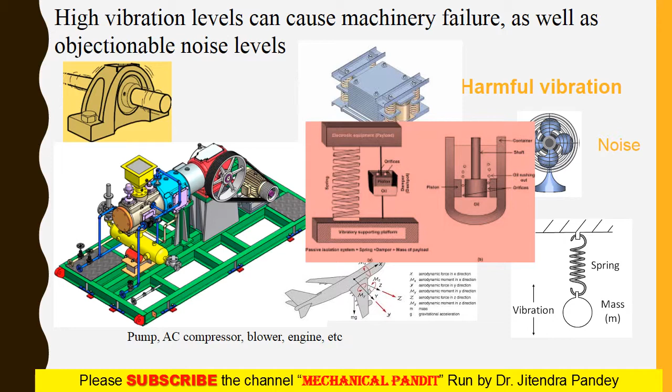This device basically isolates the vibration by absorbing some disturbing energy themselves and allows only a fraction of it to pass to the foundation. Thus the amplitude of vibration is minimized and the structure or foundation is not put to heavy disturbance.

The isolation is expressed in terms of force or motion. Lesser the amount of force or motion transmitted to the foundation, greater is said to be the isolation। जितना कम मोशन ये ट्रांसमिट कर पाएगा फाउंडेशन को, उतना ज़्यादा अच्छा आइसोलेशन माना जाएगा। This is the example of reciprocating air conditioning compressor that is mounted on a flexible roof।

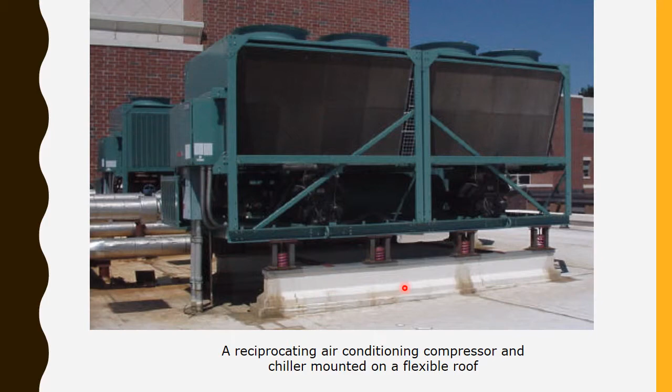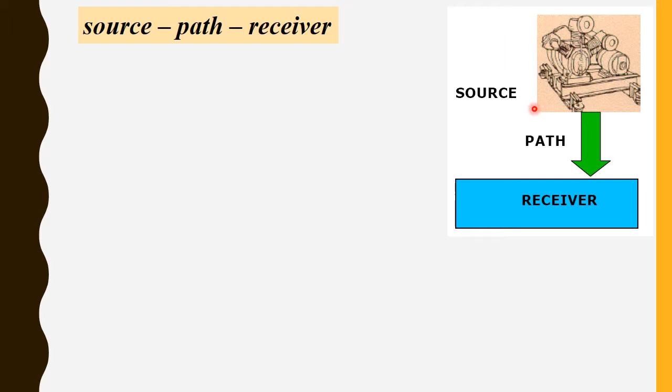बेसिकली किसी भी आइसोलेशन सिस्टम में दो तीन चीज़ें होती हैं जो सबसे इंपॉर्टेंट हैं। सबसे पहला पॉइंट है कि जो मैकेनिकल सिस्टम है या जो डिस्टर्बेंस है वह आ कहाँ से रहा है, दैट मीन्स द सोर्स विच इज जनरेटिंग द वाइब्रेशन, टॉर्क, अनबैलेंस etc. These typically occur at frequencies which are integer multiples of the rotating frequency of the machine.

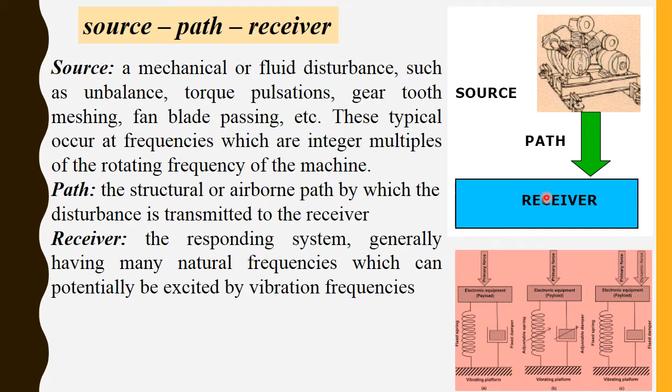Second one is the path which is responsible for passing the disturbance from source to the receiver. And the last one is the receiver which receives the total vibration. The responding system generally has many natural frequencies which can potentially be excited by the vibration frequency, and it absorbs the vibration up to a maximum extent.

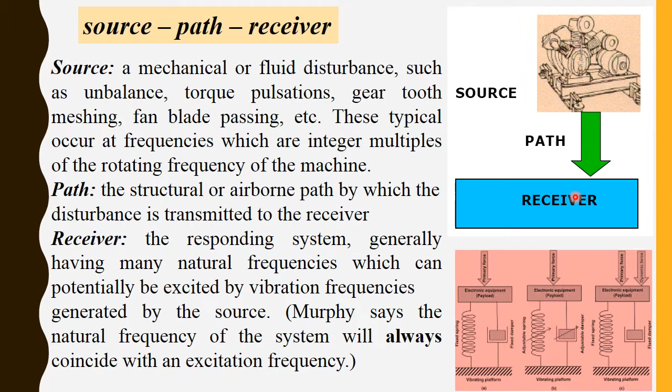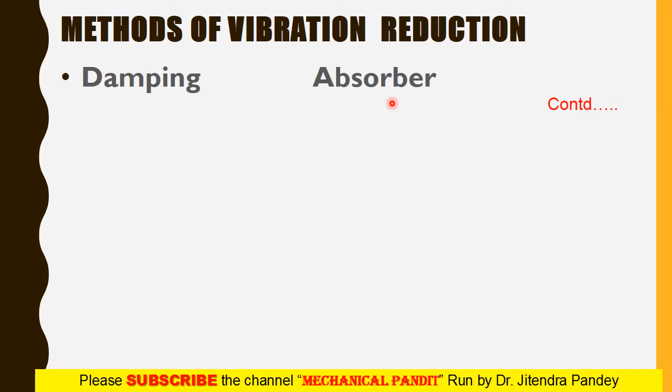We have already gone through the various methods of vibration reduction, in which we have already studied various types of damping, usage of springs, absorbers, isolators etc. These are the examples of how the absorber works, which we have already covered in our last video.

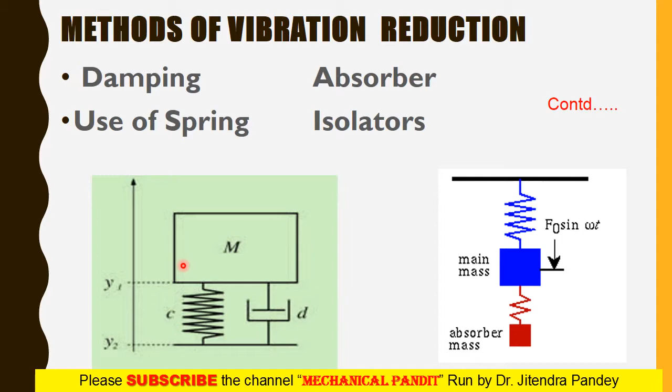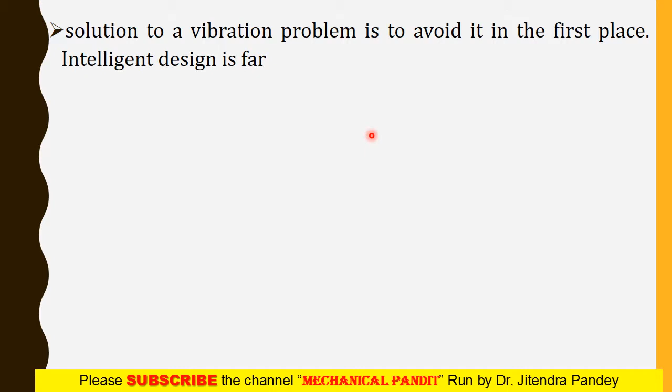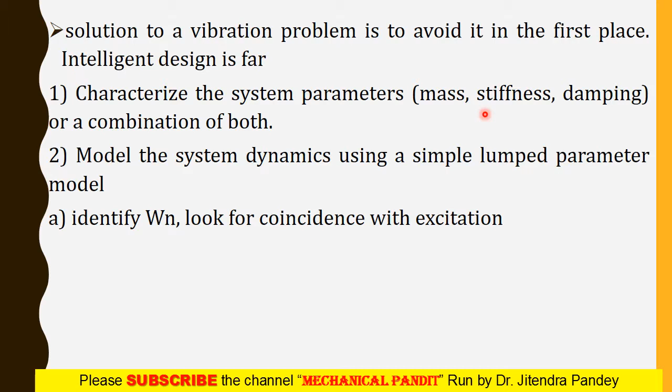Some more fruitful methods to make isolation very effective: avoid as much vibration as you can। हमें जितना ज़्यादा से ज़्यादा अवॉइड कर सके इनिशियली, दैट वुड बी मोर बेटर। Further, intelligent design is far better, such as characterizing the system parameters - mass, stiffness, damping - और इनके कम्बिनेशन को इस तरह से चूज करें कि हमारा वाइब्रेशन कम से कम हो। Model the dynamic system using lumped parameter model, that means discrete model, identify the natural frequency, look for coincidence with excitation frequencies.

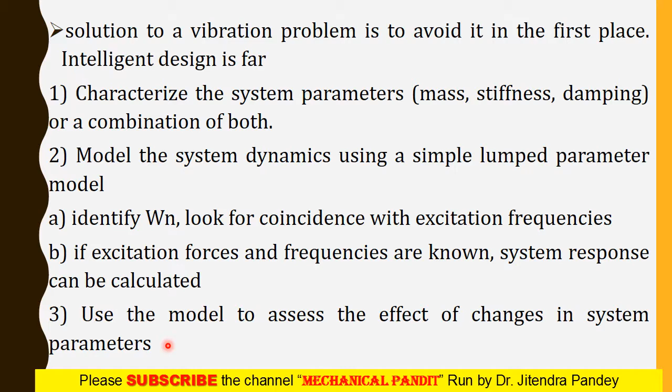If excitation forces and frequencies are known, then system response can be calculated, and use the model to assess the effect of changes in the system parameters. The parameters of the system must be known prior to designing the whole vibration or machinery system.

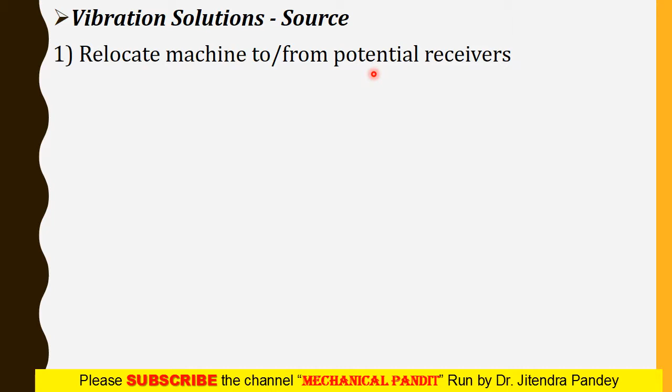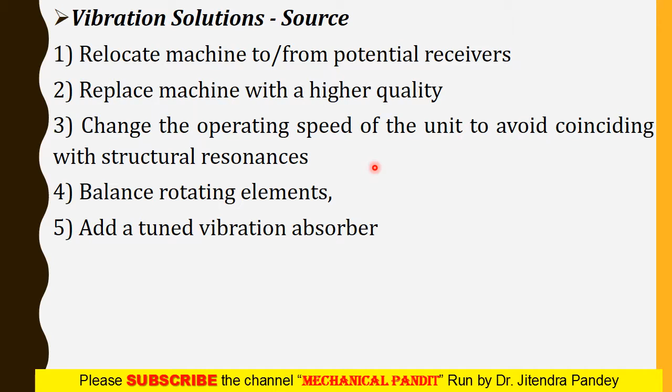These are the source - that means you have to check how the vibration is coming out. That means relocate the machine where potential receivers are present, जहाँ पे फाउंडेशन अच्छा हो वहीं पे मशीन लगाएं। दूसरा, replace the machine with better quality, change the operating speed if you can to avoid coinciding with the natural or structural resonance, balance the rotating elements, that is balancing, and add a tuned vibration absorber and active vibration control to minimize the vibration.

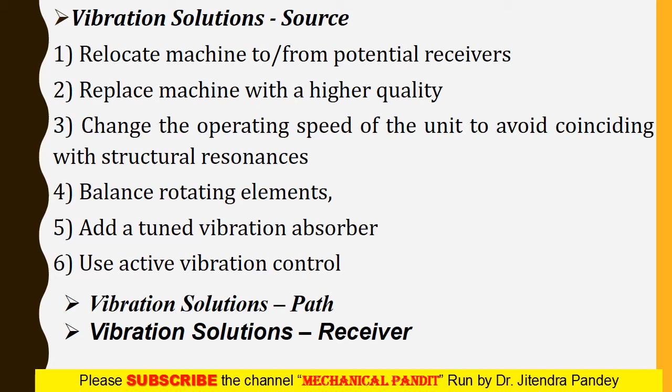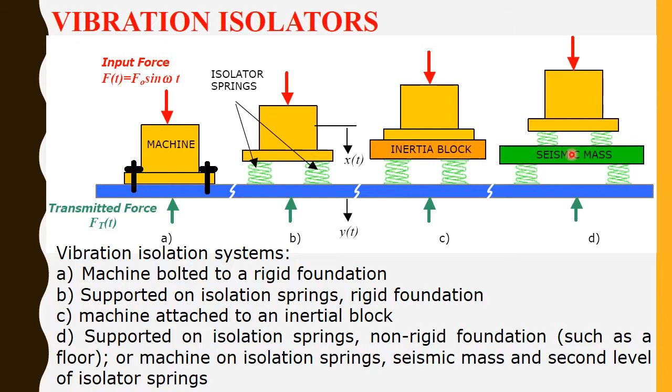Basically the vibration isolation system is composed of: machine bolted to rigid foundation supported on isolation spring; rigid foundation, machine attached to an inertia block and supported on isolation spring; non-rigid foundation such as floor, machine on isolation springs, seismic mass and second level of isolator spring.

What should we consider in case of vertical motion?

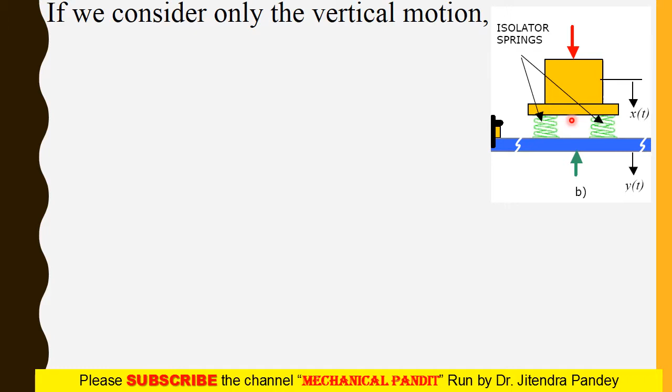The basic characteristic equation is m x double dot plus c x dot plus k x equal to f of t, that is the harmonic force, inertia force, damping force and spring stiffness force.

If we neglect damping, we have already calculated the system displacement as f naught by k, 1 minus r square, sin omega t, where r is the frequency ratio and natural frequency is defined as square root of k by m.

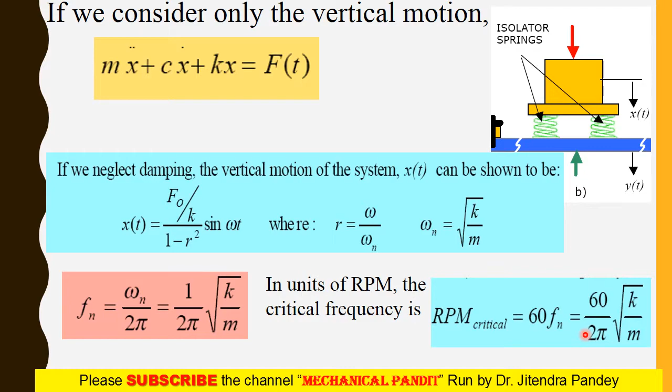We can calculate the natural frequency in units of revolution per minute. The critical frequency is 60 fn, that means 60 by 2 pi square root of k by m.

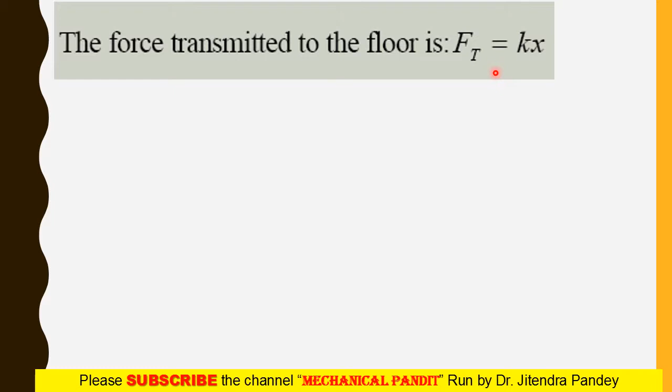The force transmitted to the floor - in force transmissibility we studied the transmissibility ratio, F transmitted equal to k x. Now the ratio of force transmitted F t upon F naught, force transmitted to the applied harmonic force, is 1 upon r square minus 1, frequency ratio square minus 1, this is the amplitude ratio.

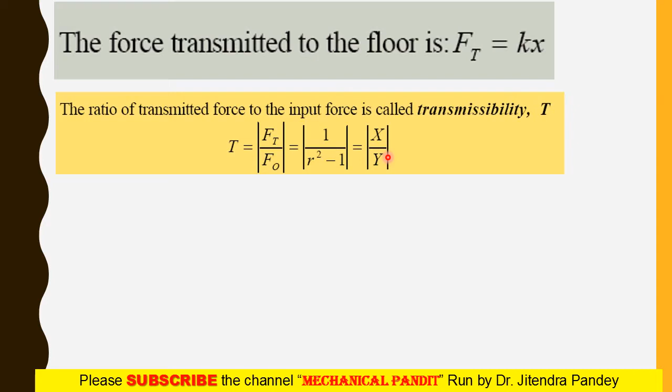The transmissibility including the effect of damping - if we include damping then this will be the formula. The basic difference between this formula and the previous one is that here xi, the critical damping ratio, is 0, meaning there is no damping in that case. But if we consider damping, the basic equation for the transmissibility ratio is this one.

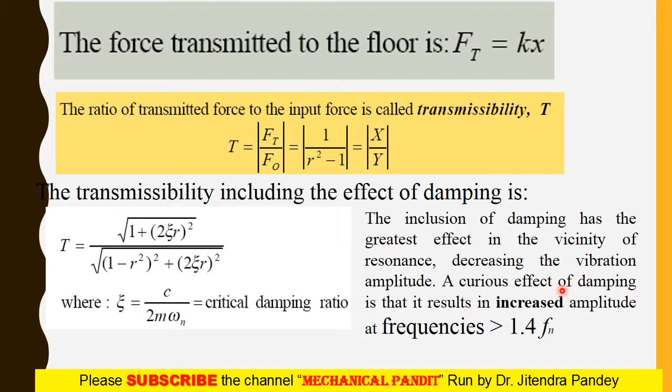The inclusion of damping has the greatest effect in the vicinity of resonance, decreasing the vibration amplitude. A curious effect of damping is that it results in increased amplitude at frequencies greater than root 2 fn.

Remember, the effectiveness of an isolator is expressed in decibel, which is the standard unit.

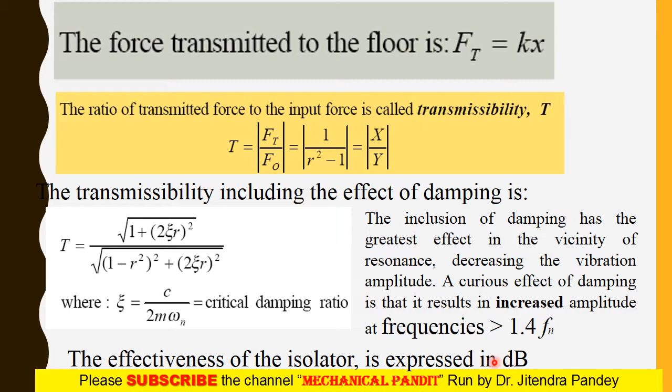This is the typical vibration isolator employing a helical spring, which provides stiffness, and an elastomeric layer such as neoprene, which provides some damping.

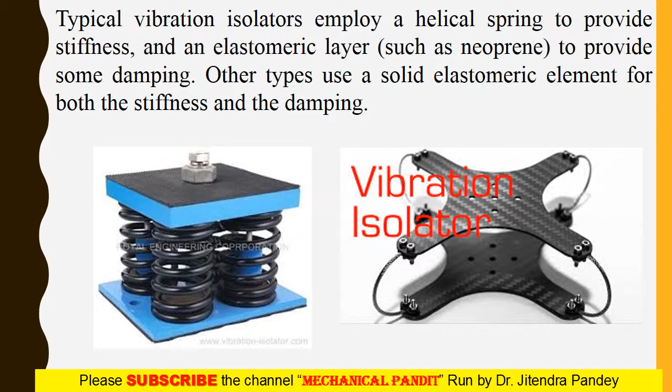Other types use a solid elastomer element for both stiffness and damping. These are a few more examples of isolators.

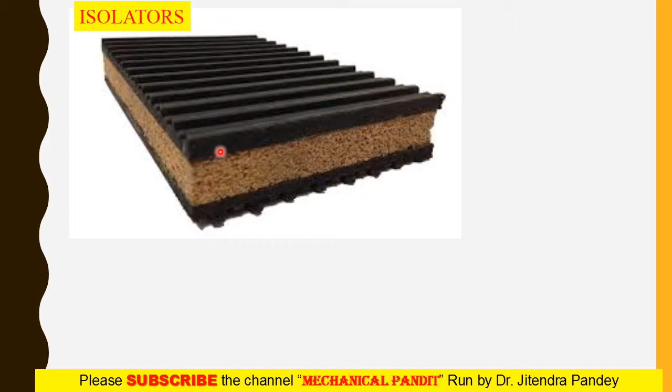Firstly, in case of isolation, there should be no rigid connection between the unit, machine, engine or vibrating body and the base. Otherwise, the undesired vibration will be completely transmitted from the unit to the base. It may again damage the supporting structure, meaning the foundation.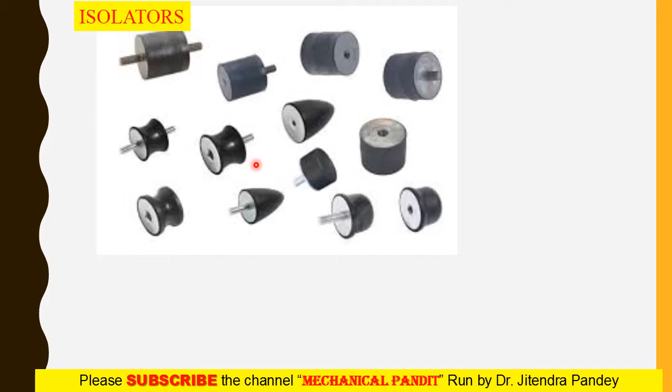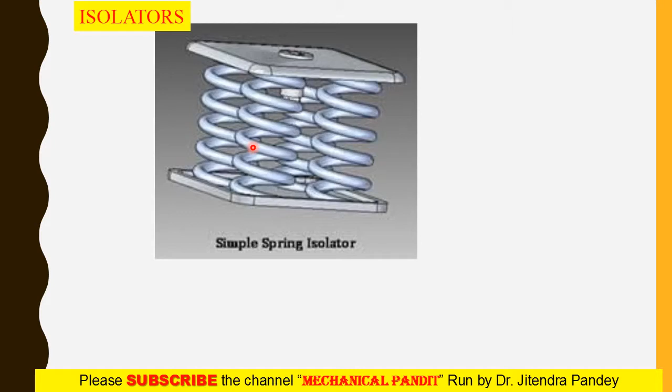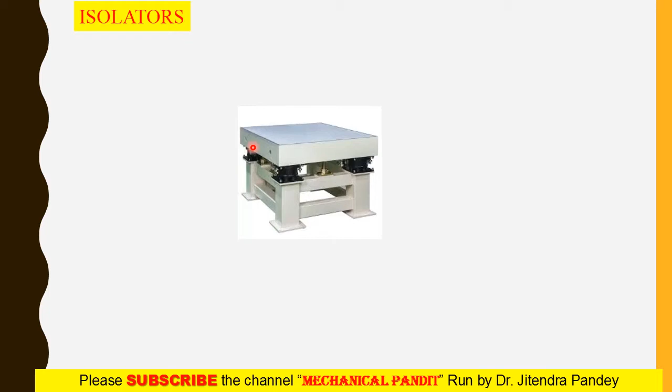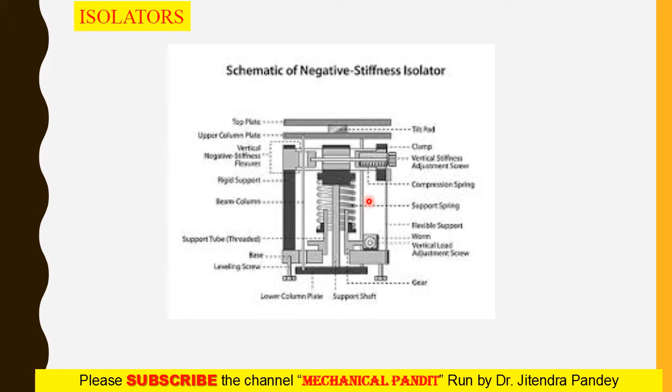In case of path failure, meaning the system fails to transmit the vibration, even then the vibrating machine and foundation should remain in place.

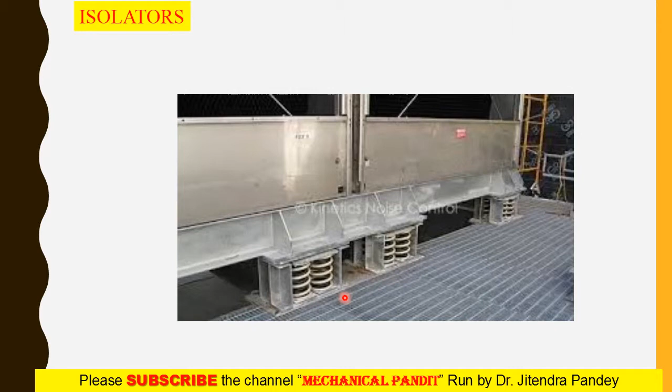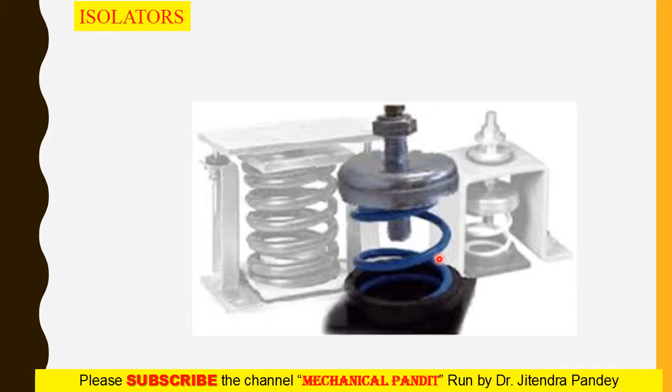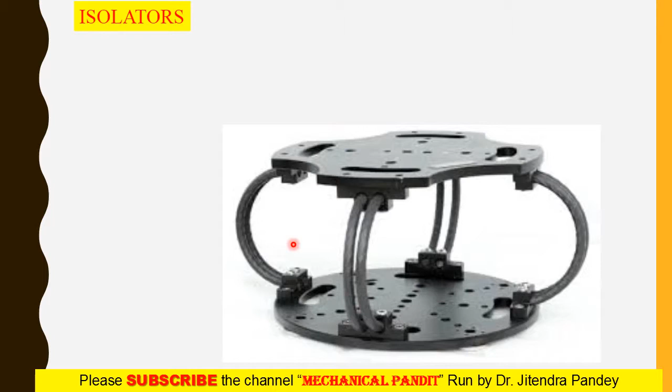These are commercially available isolators, a few vibration isolating elements which are available in the market.

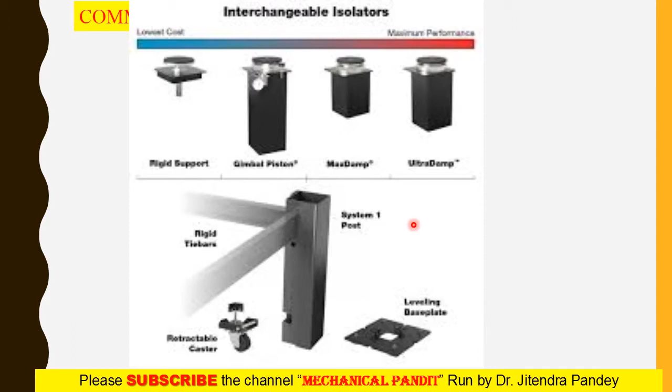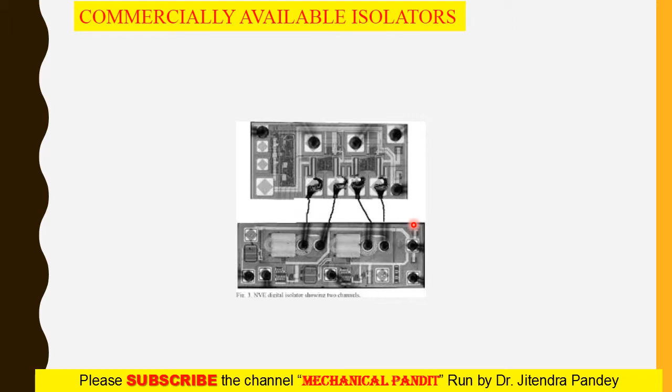The materials normally used for vibration isolation are rubber, felt, cork, metallic spring, etc. These are put between the foundation and the vibrating body. Basically, rubber as an isolator is quite useful for shear loading.

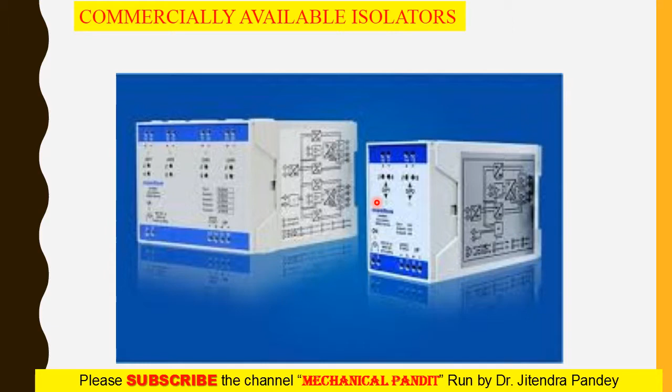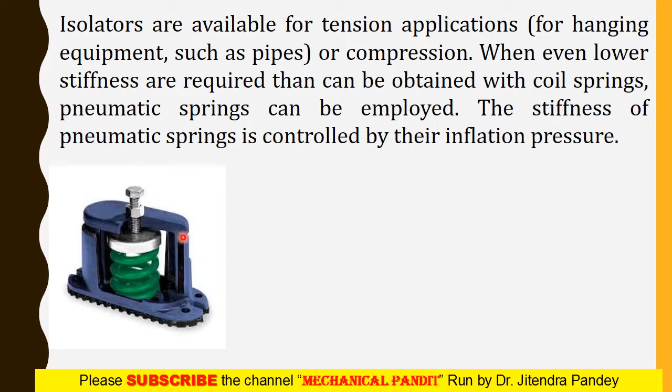When even lower stiffness is required than can be obtained with a coil spring, pneumatic springs can be employed. The stiffness of a pneumatic spring is controlled by its inflation pressure.

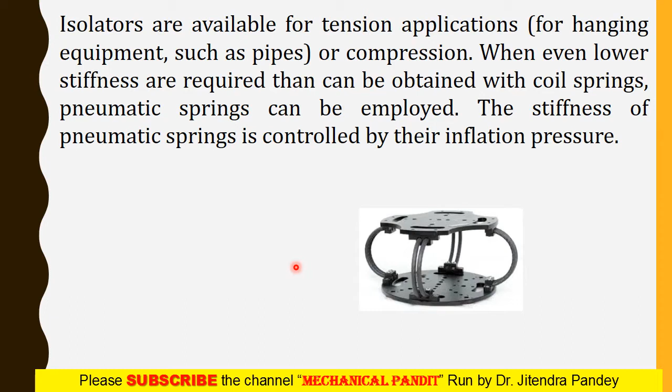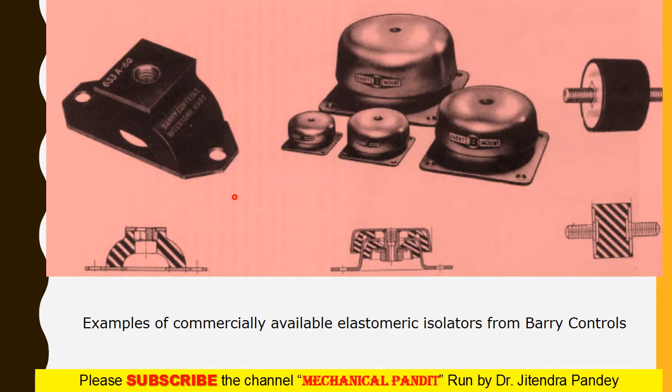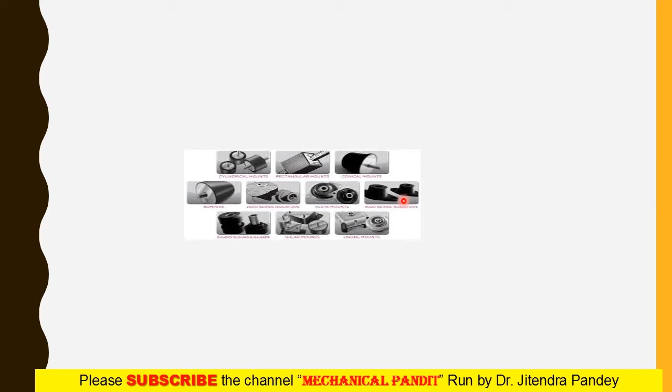As already mentioned, rubber as an isolator is quite useful for shear loading. Its sound transmissibility is very low. Its properties are influenced by heat, gasoline, oil, etc.

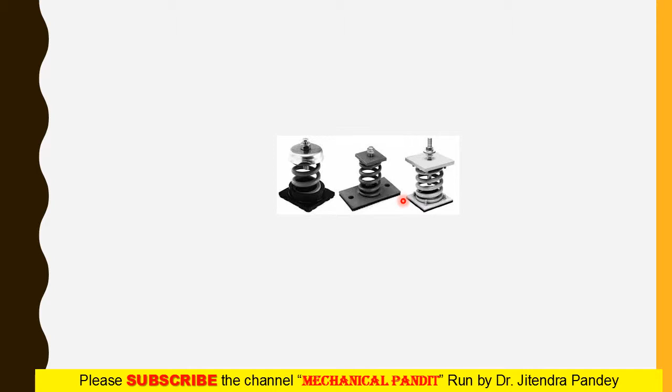So it can be used, but it cannot be used at high temperature in the presence of gasoline and oil, otherwise fire will take place. It is preferred for light loads and high frequency oscillation.

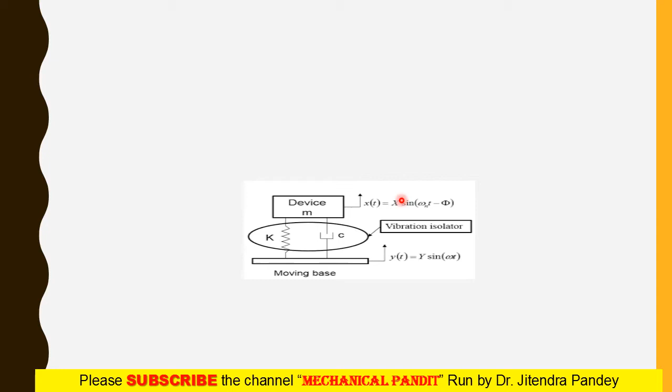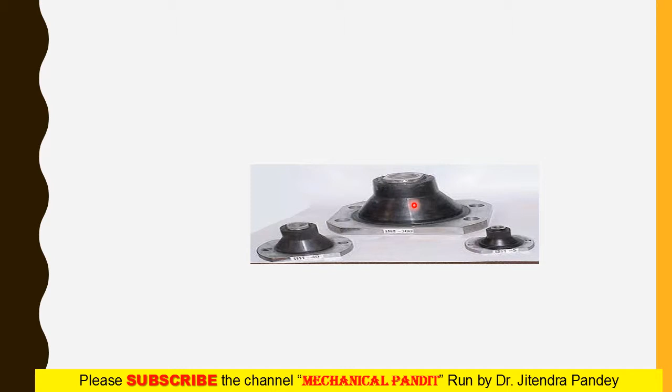The damping factor of felt is high. Felt is again a material whose damping property is very high. So it is especially used for low frequency ratio, because damping fails at high speed.

Its pads are put between the machine and the support. It is preferred to use many pads at a time rather than a single large pad of the same size.

Cork is also a suitable material, a suitable isolator for compressive load. It is not perfectly elastic. At high loads it becomes less flexible. That is the property of cork.

How to select the isolator? One more isolator I would like to discuss here: metal springs, which are of two types, helical and leaf spring. The spring has high sound transmissibility which can be reduced by covering it with pads, felt, cork, rubber, etc. The spring can be used in all working conditions because it is not affected by air, water, oil, temperature, etc. They are useful for high frequency ratio.

That means springs are always used for high speed machines. Now come to isolator selection. Isolators are usually specified by their static deflection, F naught by K, which I have already discussed, because when we calculate amplitude, it is F by K divided by the square root of 1 minus the square of the frequency ratio. That means isolators are usually specified by their static deflection.

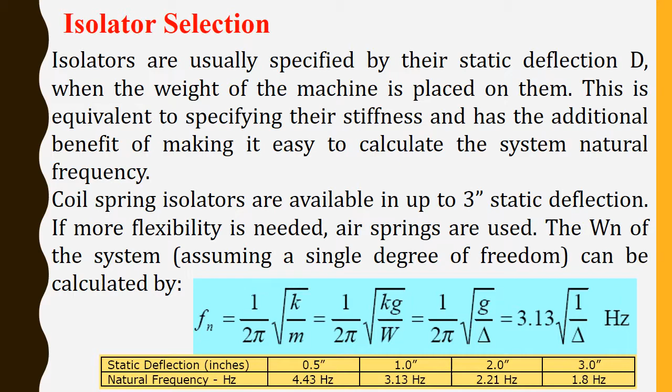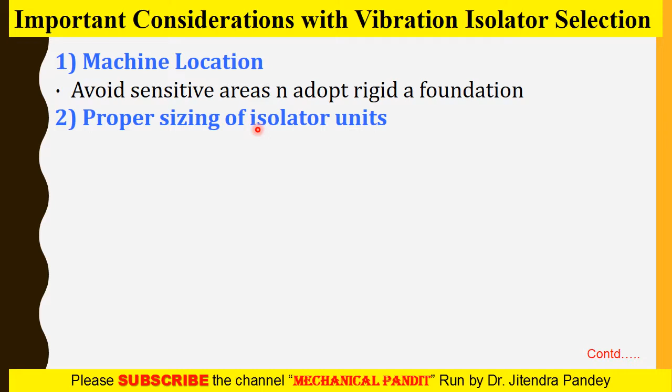Important considerations with vibration isolator selection: first, machine location. Avoid sensitive areas and adopt a rigid foundation that can absorb a little amount of vibration and will support the path.

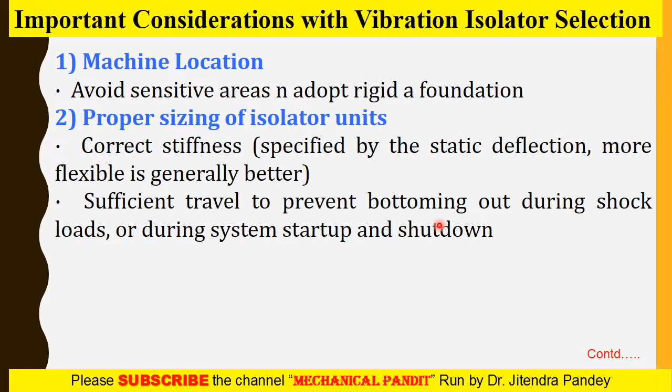Sufficient travel to prevent bottoming out during shock load or during system startup and shutdown. Location of isolators should be equally and uniformly loaded, and the machine should be at a level.

Fourth, adjustment: the spring should be free to travel, should not be fully compressed, and should not hit a mechanical stop, otherwise the spring will lose its mechanical property, that is the stiffness.

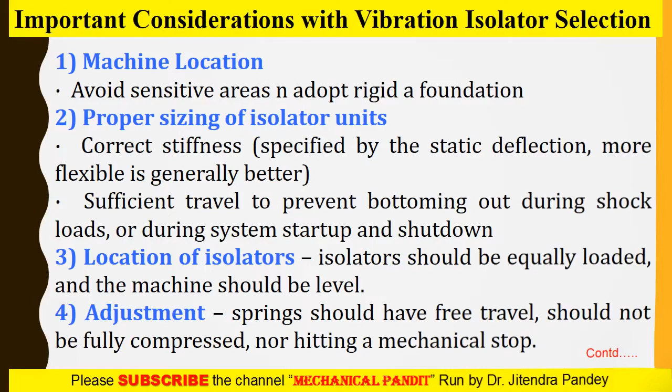Fifth point is stability. Sideways motion should be constrained and restrained with snubbers — something should be placed there so that side motion does not occur.